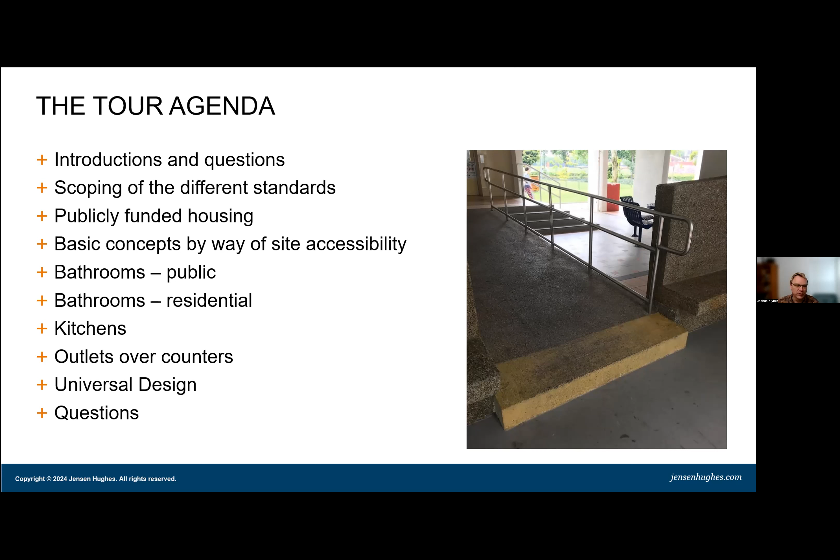What does this not include? I find this also very helpful. We're not going to be talking about existing buildings - that gets significantly more complicated and more nuanced, dependent on the specific building we're talking about and the condition they're in. We're not going to be talking about transient lodging, whether that is permanent supportive housing, homeless shelters, or hotels. We're not going to be discussing anything with a public right of way, because that is an entirely different set of standards than what is applicable within the project site.

I should probably change this a little bit. The 2022 OSSC - I'm going to mention a little tiny bit, just a couple of the accessibility changes. The 2017 A117 is kind of baked through this entire thing, but I'm not going to be addressing all the significant changes - I'll point them out where they come up. I've highlighted them in red font, but not addressing that change in standards specifically. Also, I'm going to be talking about a lot of these specialized conditions - I'll mention children's elements such as children's toilet heights, things like that, but I'm not going to go into detail. There are other specific requirements around restaurants, assembly spaces, healthcare. If you do have questions about those, I'd be happy to answer them towards the end of the presentation.

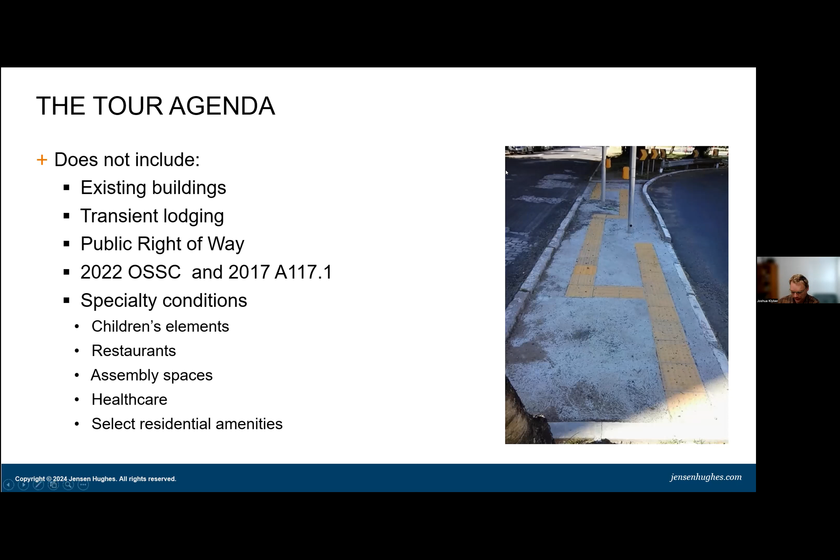All right, I'm going to get into scoping of accessibility standards.

The biggest thing about accessibility standards is understanding the difference between federal standards and state standards. I'll reiterate that all the way through this first half hour, 45 minutes, where we're talking about that. I'm going to go through most of the applicable standards and discuss when and where they should be applied, and if you have choices, what we recommend and what factors go into that choice.

Specifically around safe harbors, that always comes up as a question. I'm also going to talk about some spaces that might be a little confusing about which codes to apply. This happens a lot in multifamily. Are you applying public standards? Are you applying the safe harbors regulated by HUD? Are you applying both? I'll talk a bit about that and employee work areas, one of everyone's favorite exemptions for accessibility, and really clarifying what's required.

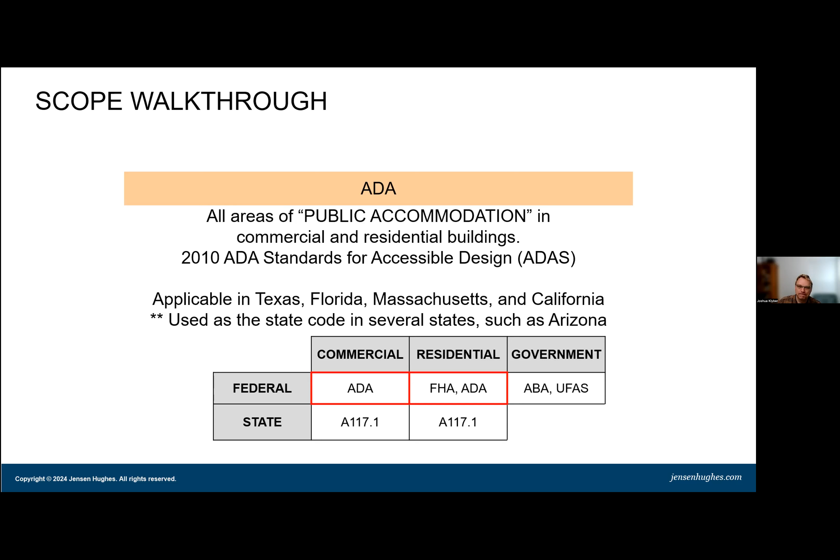What does apply to residential areas is the Fair Housing Act. Similar to the ADA, where the ADA is the federal act passed by Congress, the Fair Housing Act is a very simple little document—small but critically important, with wide-ranging implications—published by Congress.

What most people think of as, are you FHA compliant? Typically, a lot of people will think of the FHA Design Manual. That's kind of parallel to the ADA and the ADA standards. I'll talk a little bit more about the safe harbors in a slide or two.

Key things to know about the Fair Housing Act: it is applicable to any area that is accessed by residents and their guests. So not only does this include the residential units, but also the residential amenities, such as an exterior pool, a mail room, or a leasing office within a residential complex.

Other things to note: any building built before March 13th, 1991 does not have to comply with the Fair Housing Act. There is a little bit of nuance, especially if it was designed and permitted around that time, about when it was first occupied and what does it mean to be first occupied. That's some nuance I'm not going to get into today.

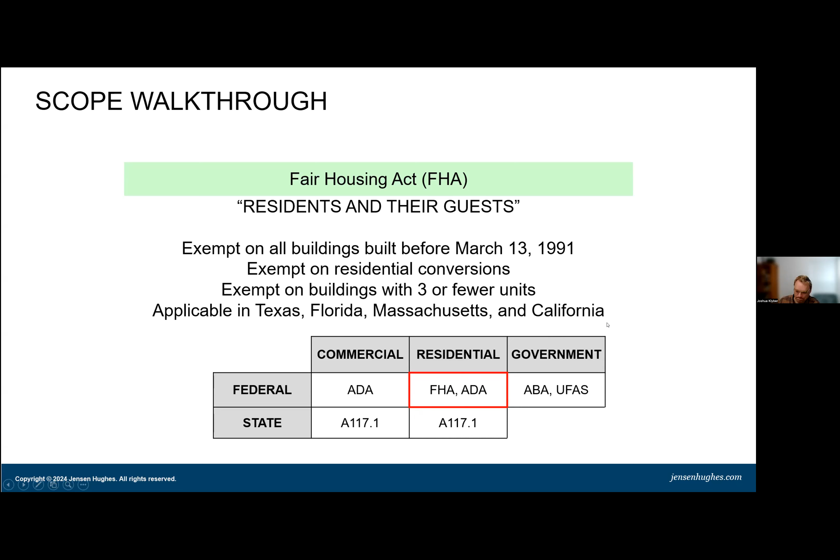So this is the federal residential code. In order to comply with the FHA, you have to comply with what they call a safe harbor. And a safe harbor is a standard - if you follow it, it demonstrates that you are fully in compliance with the Fair Housing Act. And there are about, I never remember the number, I think it's like 15 or 16.

Oh, I see a question. Somebody was saying it's hard to hear on the speaker, and I will speak a little bit louder. Thank you, Jim, I will do that.

So there's a list of about 15 or 16 different safe harbors or different standards. Most of them are out of date, say for example the 1986 version of the A117.1. For the most part, there's 3 or 4 that are commonly in use.

We highly recommend that everyone use the 2018 IBC as the safe harbor. If you're in a state that's using 2018 IBC as the state code, then by meeting state code, you automatically satisfy the Fair Housing Act. If you're in a state such as Oregon, which has been updated to be based on the 2021 IBC, it's not that big of a jump to go from the 2018 to the 2021 version. There's just a few little things that you need to know.

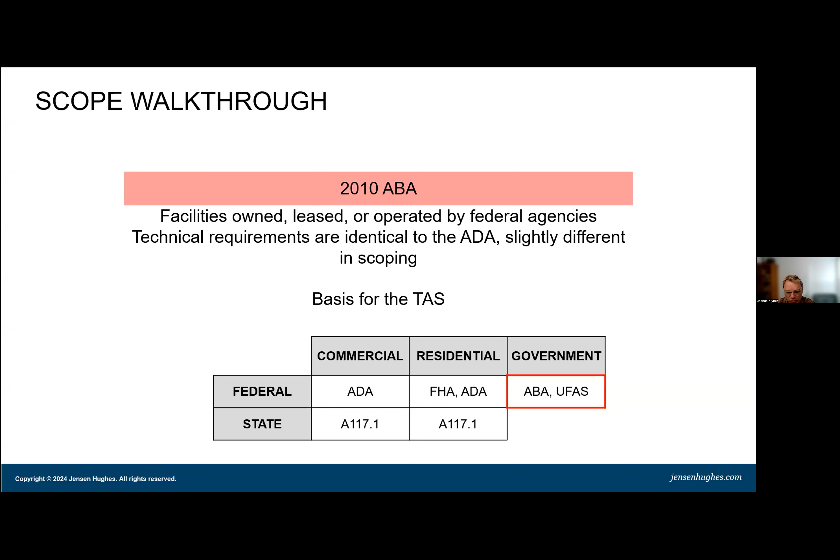The other federal standard we interact with a little bit more is known as the Uniform Federal Accessibility Standard, or UFAS, depending on how you pronounce it. This is also for federally funded, owned, and operated projects, but it applies to the residential portions, where the ABA applies to the public accommodation portion, like federal offices. UFAS is not only applicable to federally operated housing, such as BLM housing or housing at national parks, but it also applies to any kind of affordable housing funding program that is receiving money from HUD.

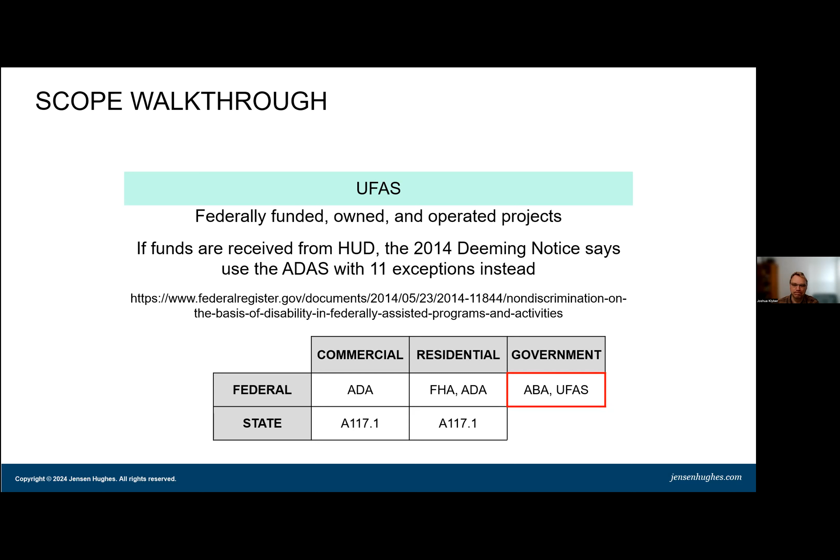All right, so I'm using this multifamily residential complex as an example of how to apply the different scoping. It can get a little complicated, especially given complicated complexes. So if you happen to have a variety of building types, say a 4-story building with an elevator and 16 units, how do you know which codes are applicable?

Just as a quick summary, the FHA is not applicable to any project that has 3 or less units, so 1, 2, or 3 units in it. So that's going to cover about 4 of the examples here where the FHA is not going to be applicable.

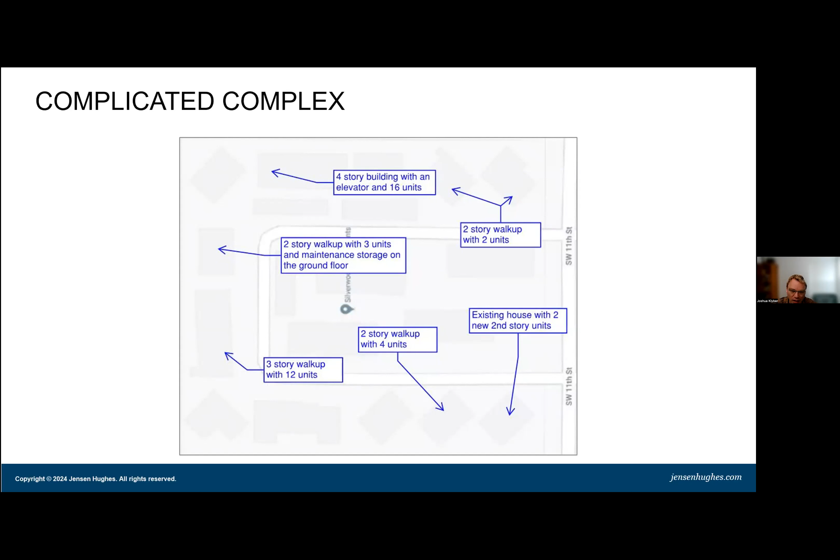So, a 4-story building with an elevator and 16 units. All units have to apply FHA-DM because it has more than 4 units, and the A117.1 because that's state code.

If you have a 2-story walk-up with 2 units, you don't have to have any accessible requirements at all because it's now under the residential code rather than the commercial code.

A 2-story walk-up with 3 units: because it's only 3 units, you don't have to apply the FHA-DM, but it's a walk-up, so you have 1 unit on the ground floor and a couple of units upstairs. You would only have to apply the state code to the bottom floor.

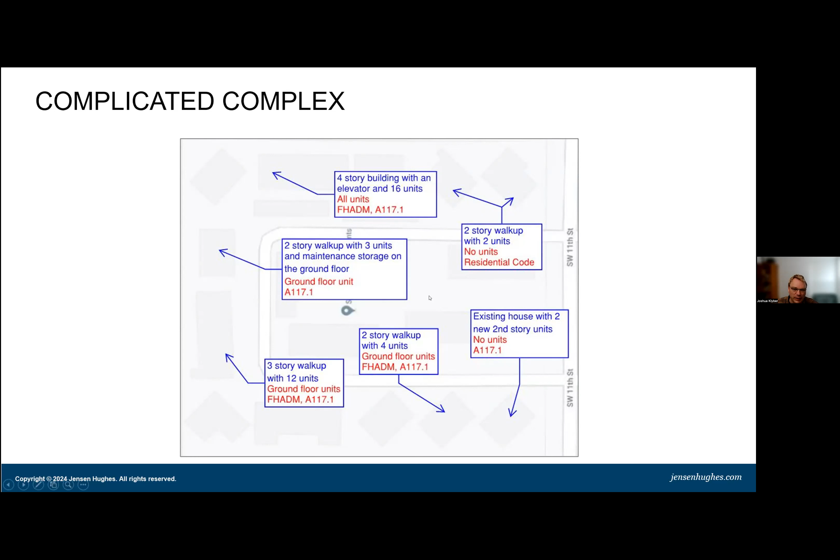So you have to take each of these buildings and analyze it per the scoping or applicability requirements of each of those different standards. It can get a little complicated, and you have to do it on a building by building basis. It's not the complex as a whole.

When you get into multifamily residential spaces, it can get complicated as to which codes apply to which spaces within the facility. So I'm going to talk about the left and the right, and then we'll go into the middle. On the left, we have public spaces - the public space areas of the multifamily residential complex where the public enters.

The leasing office, the mail room, the lobby, and if you happen to have any commercial tenants within it. Let's leave that there for now.

Going into the right hand side, if you go into the dwelling units, there are a whole bunch of different types of dwelling units. Here's a quick list of them. I'm going to go over them a little bit more when we get to the residential section of this presentation, but those are all the different ones that I'm aware of.

The ADA is not applicable inside of these dwelling units unless you're getting public funding - federal or state public funding. So the middle is where it gets a little bit more confusing.

What about these semi-public spaces or amenity spaces, like exercise rooms, pool rooms, pools, dog washes? Are those accessible by the public, or are they only for residents and their guests, or is it both public and residents? Generally, we recommend that you apply both and assume there will be public access to any of the amenity rooms. This allows a lot more flexibility for the use of that space.

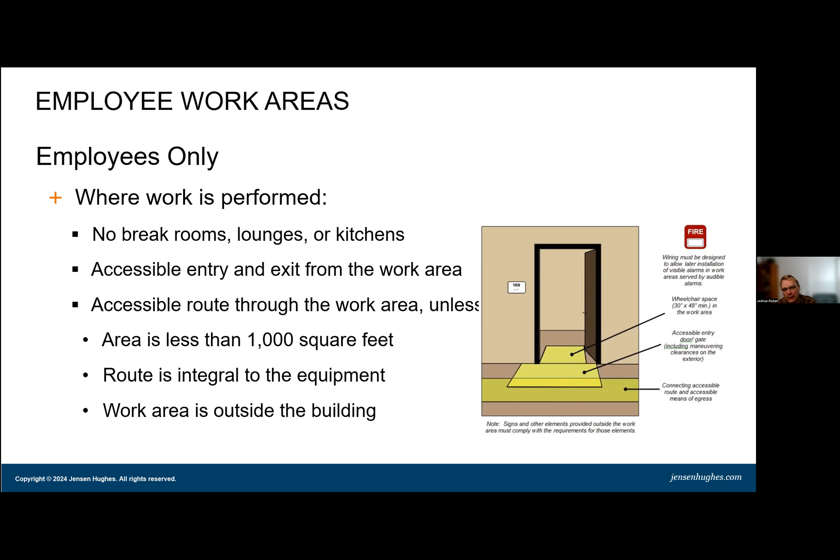One other quick thing to differentiate: employee work areas are not mechanical rooms. So your IDF, MDF, sprinkler rooms, boiler rooms, things like that, where it's a mechanical space accessed only for maintenance - that is not a work area, it has a separate exemption, and is not required to be accessible.

All right, that is the first section on generally how to apply the various accessibility standards to most projects. This next section is going to be specifically about publicly funded housing, because that gets a lot more complicated. Are there any questions at all at this point about scoping?

Wait for a second, let's see if anything pops up in the chat.

Okay, so let's go on to publicly funded housing. For those of you who were at the AIA Oregon Design Conference in Bend a couple of weeks ago, you may have already seen this section, but I'm going to rehash it here for those who haven't seen it yet. What is public housing?

I actually want to switch that to public funding. Public housing historically has been known as like 'the projects.' The picture on the right is an example from, I think, either Manhattan or Brooklyn, of some tenements - probably Brooklyn. They don't really look like this anymore.

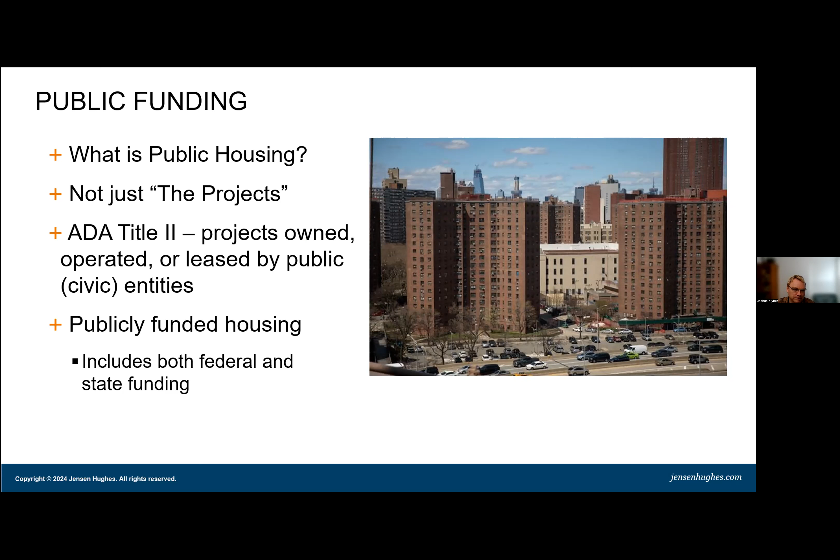So here are some examples of different types of publicly funded housing projects: low-income housing or affordable housing, transitional housing, sometimes known as permanent supportive housing. We also get transient shelters affected by ADA Title II, and facilities receiving public funding like alcohol and drug rehab.

Probably one of the lesser known ones is public universities. Any housing owned and operated by a public university is also considered publicly funded. This includes not only the dorms, but also fraternities and sororities. You have to be a little careful, though, because some of those fraternities and sororities are independently operated as a private club, and therefore ADA is not applicable to it.

Some of these buildings are actually owned by the university itself but operated independently. In that case, you do have to apply the requirements, not because it's a private club, but because of the funding and ownership of the building itself.

One key thing, and we'll get more into detail on this, is how do you know that funding is being provided for this particular project? The key phrase I always go back to is cash money. Is there cash money being provided to support the construction of this project? It's not necessarily tied to affordable, low income, or transitional housing intent. I'll get into some examples of what is not considered public funding.

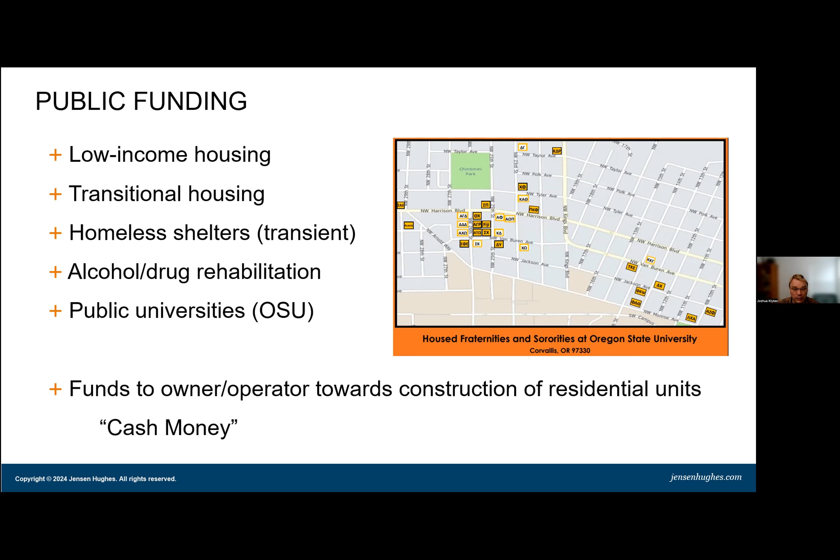Some of it also depends on where that money is coming from. If it is coming from HUD, that cash money is coming from HUD, not a loan, not tax credits, not mortgage insurance, but cash money, either in the form of a grant or a subsidy. It's coming from HUD, and then it triggers something called Section 504, Section 504 of the Rehabilitation Act of 1973.

Be careful, because each federal department has their own Section 504. There's HUD Section 504, Department of Energy 504, Health and Human Services 504, Department of Agriculture 504. HUD's is the most developed and most widely known. The technical reference is 29 U.S. Code Section 794, if you ever want to look it up. It's a dense read, only the really dedicated people might want to look at it.

Little side note, HUD Section 504 also applies not only to housing but also to education, healthcare, parks, and social services, because they fund a whole bunch of other corollary services besides housing.

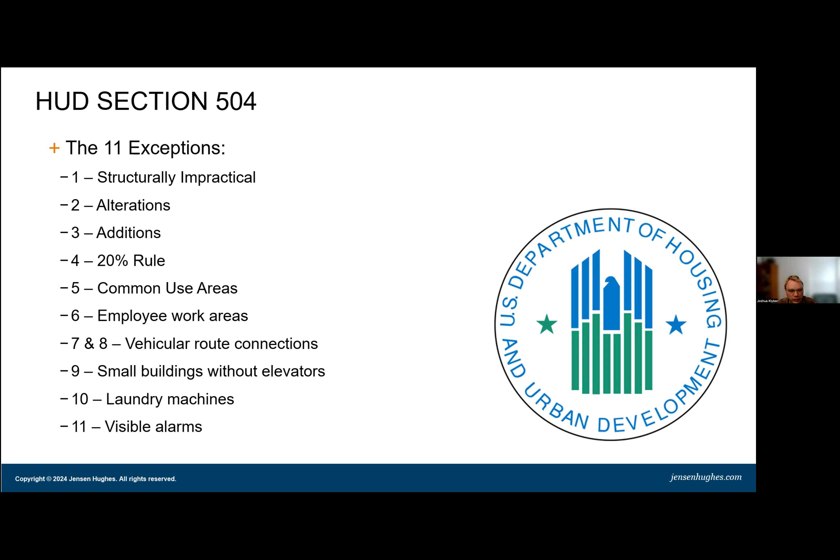Take a more specific look at these exceptions. There are only two that regularly come up on new construction of publicly funded housing, and I'm going to address those. The first one is employee work areas. That entire discussion about employee work areas, everyone's favorite exception—you can't use it in publicly funded housing. All employee work areas must be fully accessible.

This includes the back of house areas. The harder part on the upper floor is going to be janitorial closets, so that means you have to have an accessible mop sink. What does that look like? And you have to have accessible trash rooms.

So the dumpsters in your trash rooms in publicly funded housing have to be accessible. Good luck trying to find a dumpster that fits within the 48-inch high reach range. In California, where everything is a lot more strict, they will quite often put a ramp in behind the dumpsters, so that it has an elevated landing—that way the height of the dumpster drops to less than 48 inches above the walking surface.

Here in Oregon, it's not really done. Or Washington, it's not really done. I'll talk a little bit more about that on the next slide, about enforcement and what you really have to pay attention to.

And once again, I want to differentiate employee work areas from mechanical, electrical, telecom, and sprinkler rooms. Those are exempted under maintenance spaces or maintenance-only access.

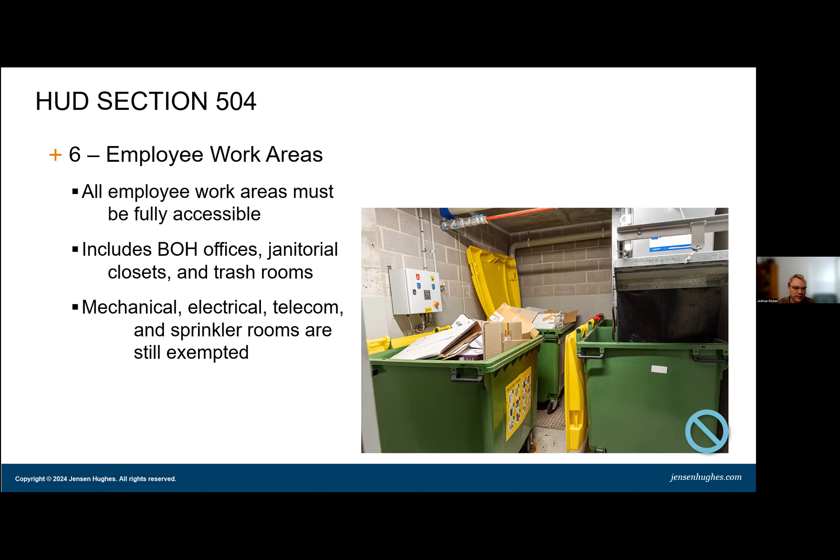The other one is going to be laundry machines. This is not necessarily going to be within the units, but in the common areas. According to ADAS, you need to have either 1 or 2 accessible laundry machines—not 5%—depending on how many are provided. But under the 11 exceptions, all machines have to be within the reach range.

So I want to address enforcement. One of the big questions is, okay, so you get public funding—say you happen to have stacked laundry machines, or dumpsters that are not fully accessible—who's enforcing that? Who's looking for that? Theoretically, it's going to be the people distributing the funds, whether that's HUD or your state agency.

Off the record, I've had conversations with a man named Rex Pace, who is currently head of architectural requirements for HUD and oversees enforcement. I asked him specifically about stacked laundry because to be compliant, you're removing approximately half the laundry machines in the facility. Who does that really benefit? You're not really benefiting anybody. And his response was...

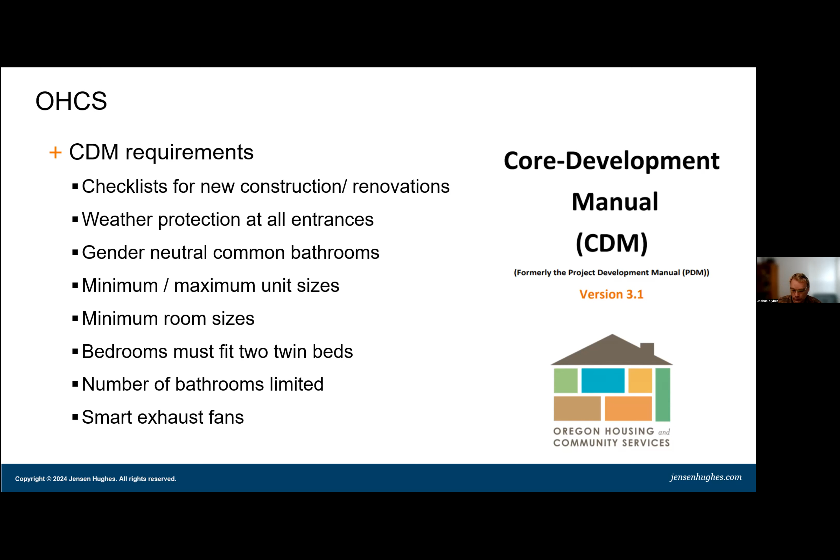The visitability requirements are triggered by getting public funding through OHCS. Keep in mind this is a different set of requirements than what's present in the A117.1. It's via this ORS - I should probably put that number up again. Most people have never seen these or looked at these.

It's very easy to meet - basically if you're meeting Type B requirements, you've got visitability covered. There are 2 situations where these visitability requirements might come up. If you have townhouses that are raised up, where the primary entrance is up a set of stairs, like on the right, and they're publicly funded, that would not be allowed. You have to have a stepless entry to every covered unit, so you're not allowed to do raised multi-story townhouses like these.

Also, if you have more than 20 units on a site, you have to have a public access common bathroom, typically at the leasing office or a clubhouse. So it's not very often you see a large publicly funded complex that doesn't have an office with a common bathroom - doesn't come up very often.

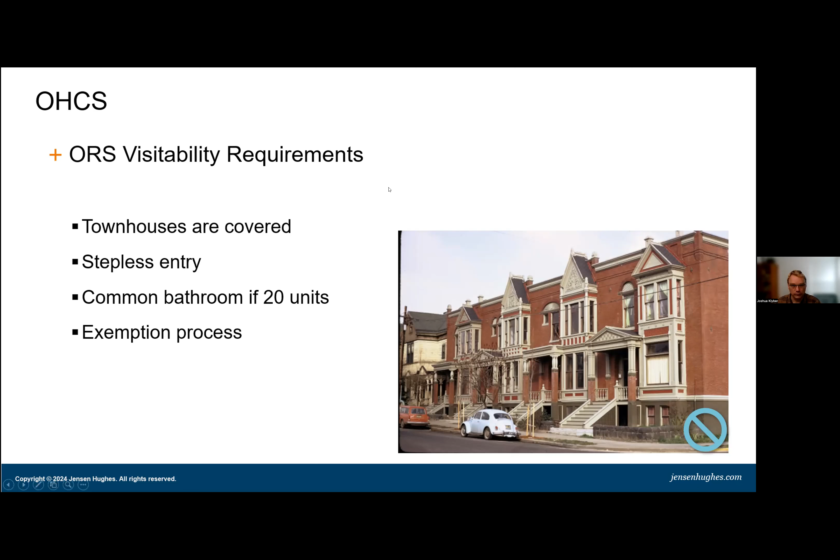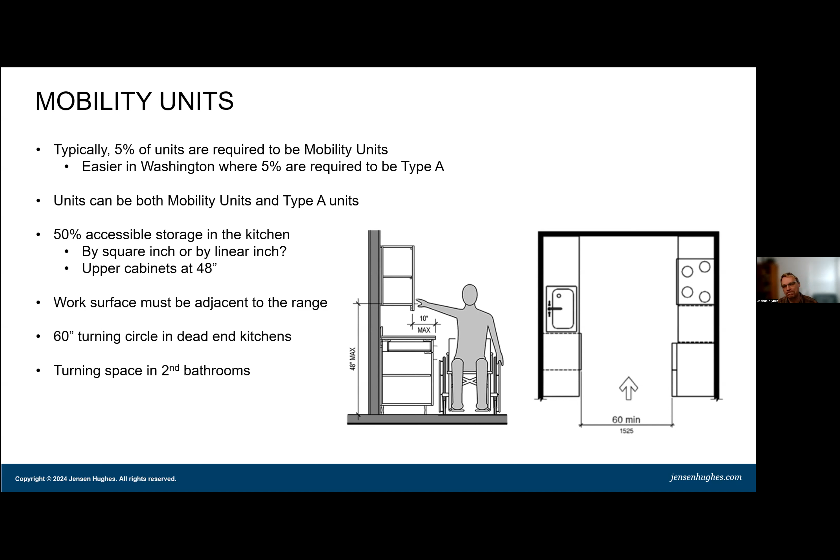So, how to calculate 50% accessible storage? The best, and as far as I know, only example in writing that's been published is by the San Francisco Mayor's Office on Disability. This is just the first page—it's actually a 2-page published PDF. The link is in the bottom left-hand corner.

And they use the area method. There's a couple of interesting interpretations that they've used that they employ on this. One is that the handles of the cabinet doors or drawers have to be located within the reach range in order for it to be considered accessible.

This affects the upper cabinets such that if the top of the bottom shelf of the upper cabinet is at 48 inches or 46 inches, depending on the depth of the cabinet, that handle also has to be all the way at the bottom. You can't locate it an inch up in order to have it look nice. But this is a San Francisco interpretation—that's what is required there in that particular city.

The other interesting one is in upper cabinets, you have to have a movable shelf, and that has to count toward that calculation. So you can't just provide a full height upper cabinet with no movable interior shelf. One other thing I should note: when you are calculating the 50% accessible storage, you cannot count the removable cabinets underneath the sink and the work surface, because it's assumed that they're going to be removed.

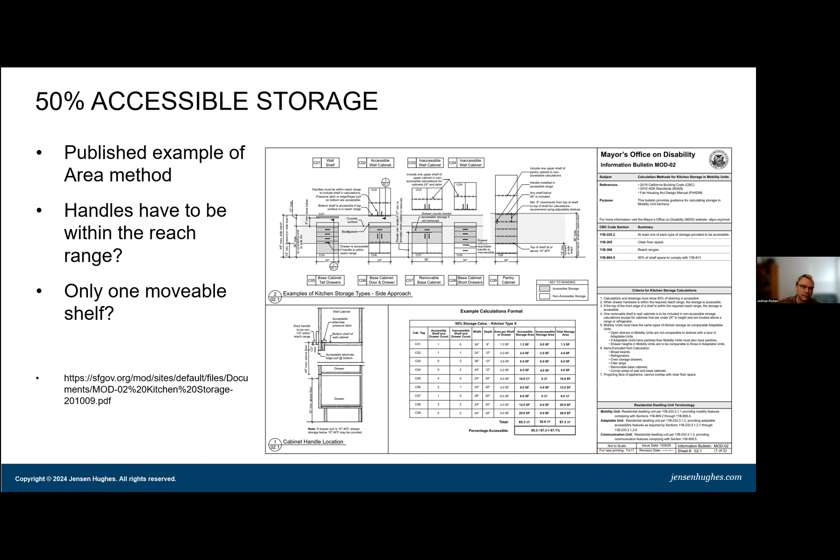The other thing that's required by public housing is communication units, and communications units may or may not be required depending upon the state. They are not required at the state level in Oregon, but I believe they are in Washington. It depends upon whether Appendix E of the IBC has been adopted by that particular state. Communication unit requirements under the ADA are pretty much identical to those at the state level. Typically, 2% of the units in public housing are required to be communication units. Be careful because it's a higher percentage in transient housing, so hotels and places like that.

They do not have to overlap with mobility units. Under transient housing, the requirement is that there has to be at least one communication unit that is also a mobility unit, but a maximum of 10%. We recommend going with that same guidance. There are people out there who are both blind and have mobility issues, or are both blind and deaf, especially in the elder communities. But we recommend separating them out as much as possible.

So what's required for a communication unit? Instead of just having a horn fire alarm, you have to have a strobe as well. You also, if you have a—what are they called—Door King, where you have the building entry device, that's at the main entry to the building.

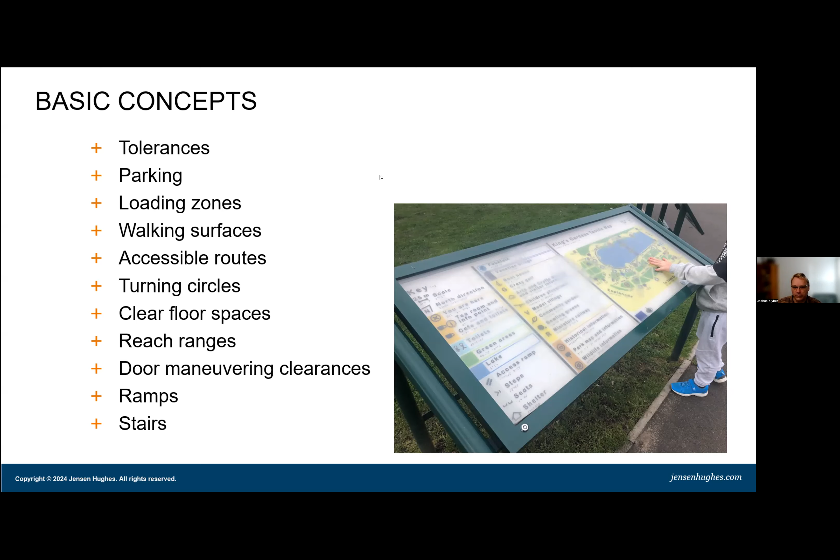Key things: 2017 A117.1 changes. Just want to run through these. This is a quick little summary of what has changed in Oregon and will be coming to Washington sometime very soon.

Chapters 10 and 11 have been reversed. In the 2009 version, 10 was residential and 11 was recreational elements. Those have been reversed, more to be in alignment with the ADAS, but what it means is that you have to change all the code references on all of your standard accessibility sheets.

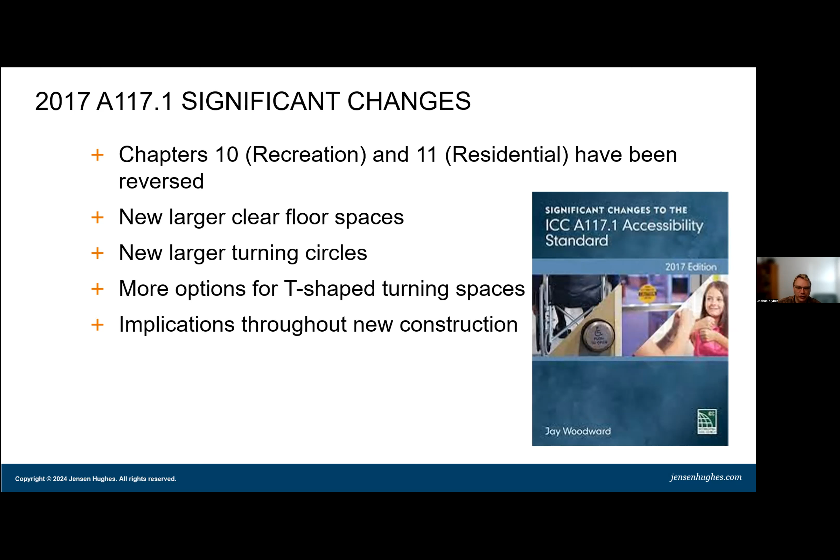Larger clear floor spaces, larger turning circles, more options for T-shaped turning spaces, and there are implications of all those things all the way throughout new construction, and those have been worked into all of the upcoming stuff.

Tolerances. Technically, there are tolerances allowed by the code if you have a minimum, a maximum, or a specific measurement. However, these are industry standard tolerances which are not defined, and they're arguable as to what they are. So what is the tolerance on providing a 30 by 48 clear floor space beyond the swing of a door? Nobody knows. Is there an industry standard that's been published for that? No.

So do not rely on these tolerances. One of the biggest things you can do to help accessibility go smoothly on a project is to build in tolerances into your drawings.

Places where that is critical is going to be in your hallway widths. I was just on a project a couple days ago where they had a hallway that was at 35.5 inches instead of 36, and that was because of baseboard. They did not really want to swap out their baseboard, and it was really hard to fix.

Clear floor space beyond the swing of a door in a bathroom - the problem is that you don't really know if you meet it until everything is installed, and at that point in time, it's really difficult to fix. And bathrooms are always really tight. There's examples of other places where you might want to include some tolerances into your drawings as well.

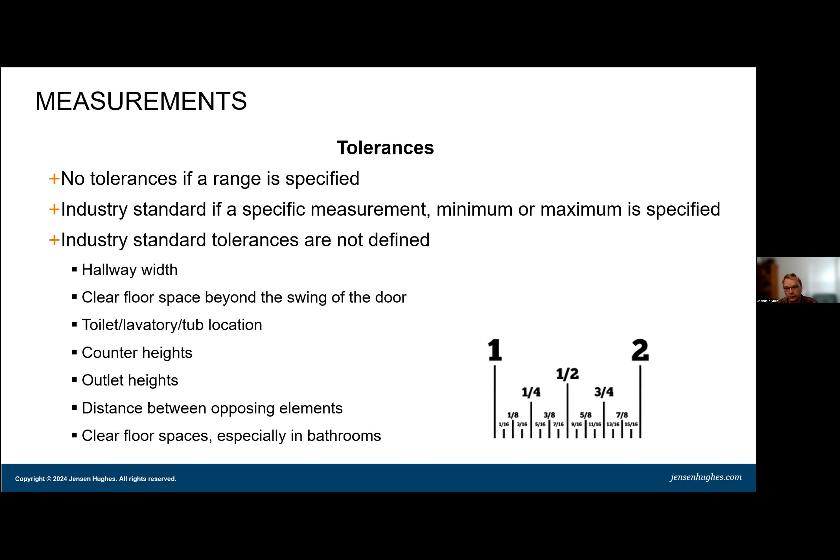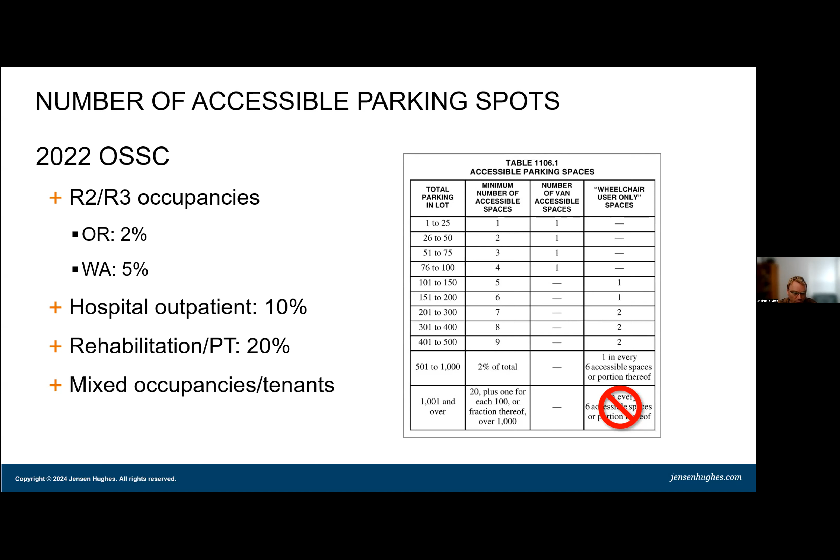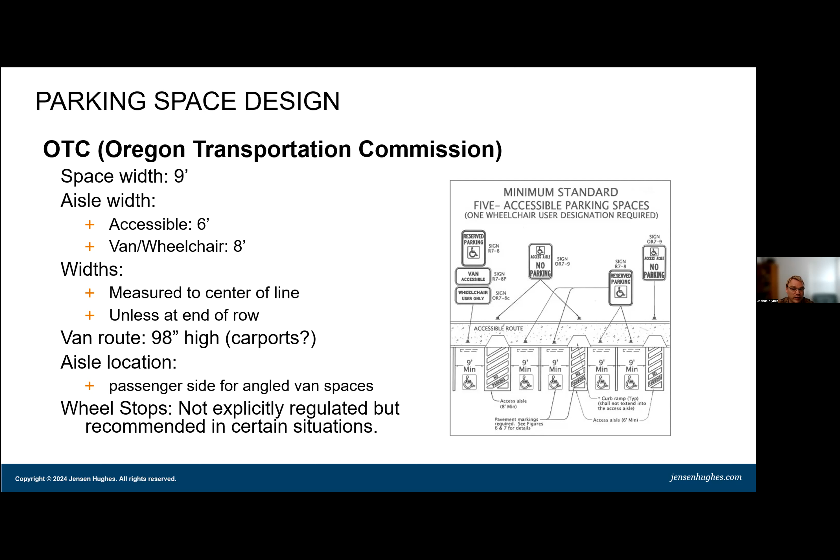Also, wheel stops - they're not explicitly regulated, but kind of recommended, such as in the picture on the right, where you have a parking space adjacent to an accessible route and the car overhang might decrease the width of that accessible route.

Kind of newer things as of August 2019 - I suppose that's 5 years old now. Some people still are not aware of this, but the aisles have to be marked for no parking. This is based upon what's been happening in California, where motorcycles have been parking in the accessible aisles. So they want to make it a lot more explicit.

For the most part, you do not need to install the post-mounted signs at the bottom indicating no parking in the aisle. Those are only required where there's snow or sand regularly present, so that you will not be able to read the marking that is on the pavement.

I'm not sure, but I believe that Bend might be requiring these post-mounted signs. Part of this is due to how much snow is there on a regular basis, plus how strict and conservative they are in terms of accessibility. If anybody is aware whether these are required in Bend or not, let me know.

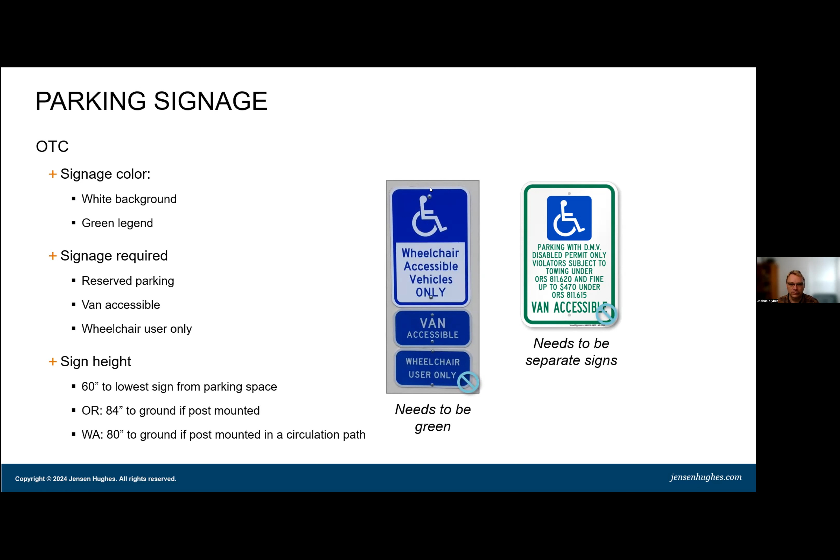I have another question. Melissa has asked if the height measurements on this last slide are measured - where are they measured to? It's measured to the bottom of the sign, the bottommost sign, depending on which sign you have.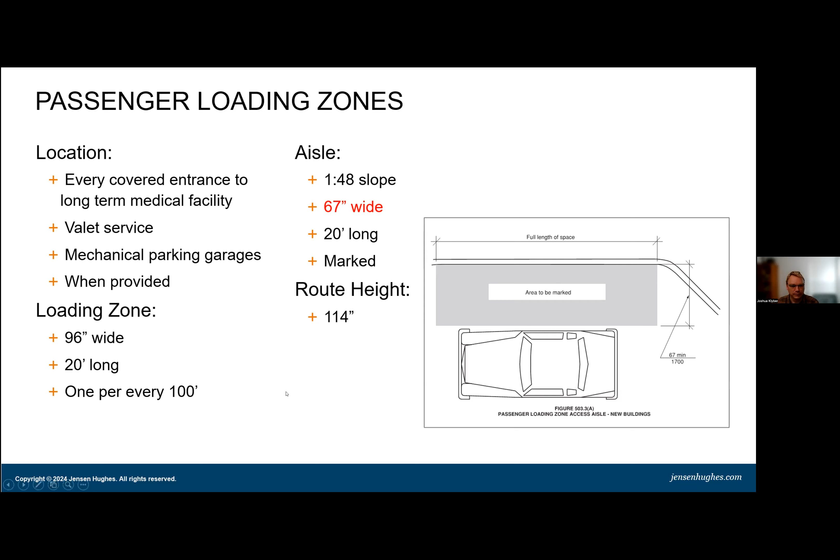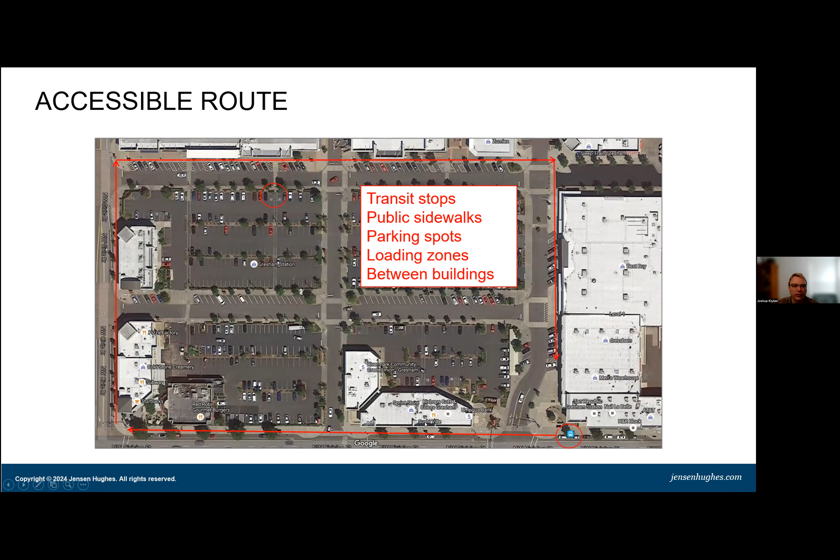It doesn't necessarily have to cross through the parking lot. Accessible routes need a minimum of 36 inches wide.

Let me throw in a caveat here. There was a new change in the 2017 A117 - exterior accessible routes now have to be 48 inches wide. I'll put this in the presentation before I send it out. So that affects exterior accessible routes, they have to be wider. Typically sidewalks are either 4 or 5 feet wide, occasionally up to 6.

One minor change due to the new 2017 A117.1: that distance between obstructions has now increased from 48 to 52 inches because of the expansion of the clear floor space. Also note that when measuring the clear width of hallways, because it says clear width, that does not include the baseboards. This is a matter of some debate, but it also depends upon the size and shape of the wheelchair and how the wheels are designed. In order to be safe, measure between the baseboards.

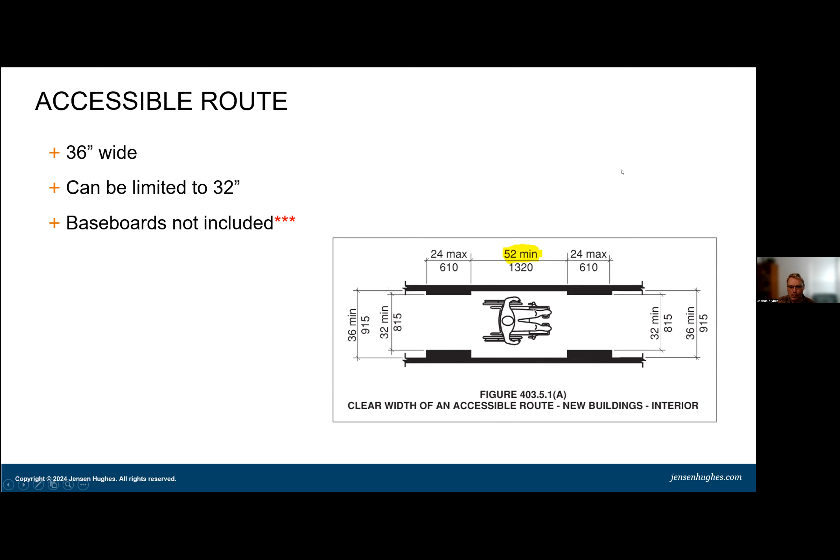In the 2017 code, there are also new requirements for doing 180 turns - there is a new third option for that. I want you to keep in mind that this 180 turn is not applicable at ramp landings. It is applicable... where do we usually see it?

Doorless bathrooms - at airports, train stations, we see it in bookstores and libraries where you're moving from one stack to the next. We also see it in queuing lines at airports, security gates, security points, movie theaters, things along those types of spaces.

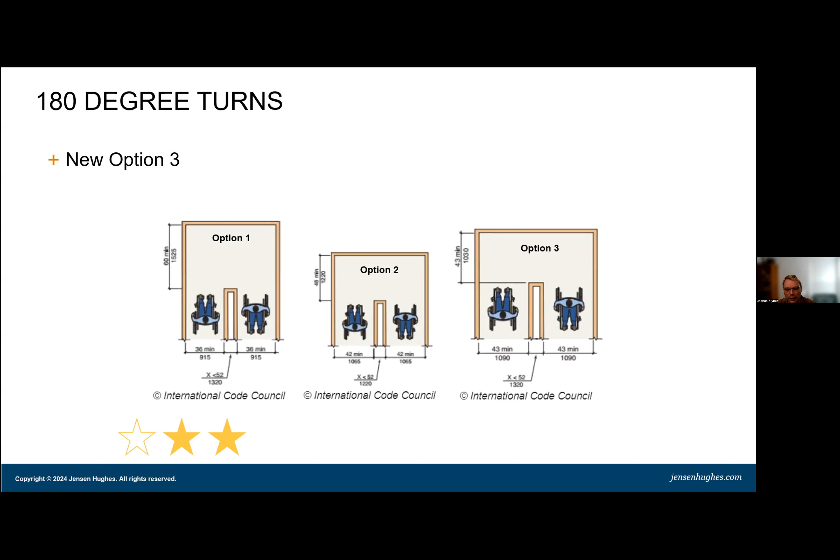What is new and is now in the 2017 code is 90-degree turns. Once again we see this in doorless bathrooms, residential facilities. Hopefully you're not designing 36-inch corridors, but basically you're not allowed to do a 36-inch to 36-inch corridor - you have to either do like 38 to 42, or 36 to 44. Those are options 3 and 4. I highly recommend that you don't do option 1 or 2 because it's just going to be more of a pain for the framers and the sheetrockers.

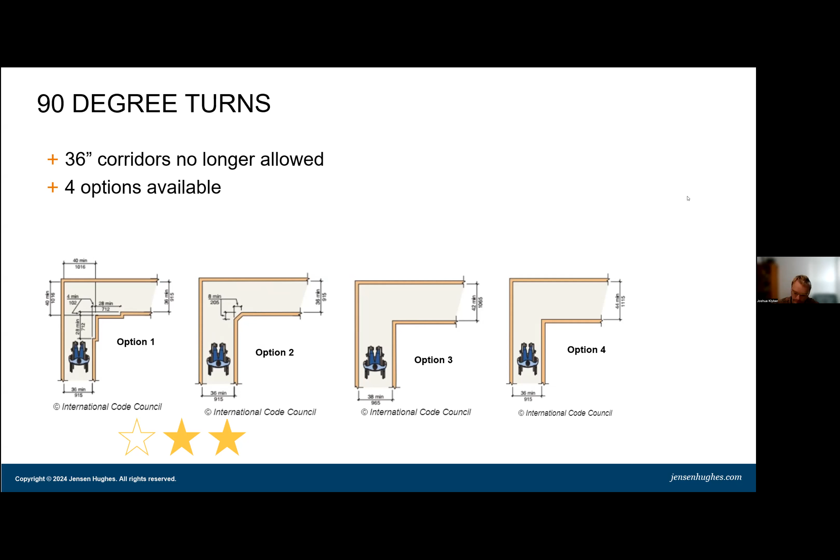Along various walking routes - and I want to differentiate that this is not along an accessible route but along a circulation path, which is anywhere someone might reasonably walk - you have to deal with obstructions along that path. Anything located between a height of 27 inches and 80 inches and sticking out more than 4 inches is considered an obstruction, and you definitely need to have a cane guard underneath.

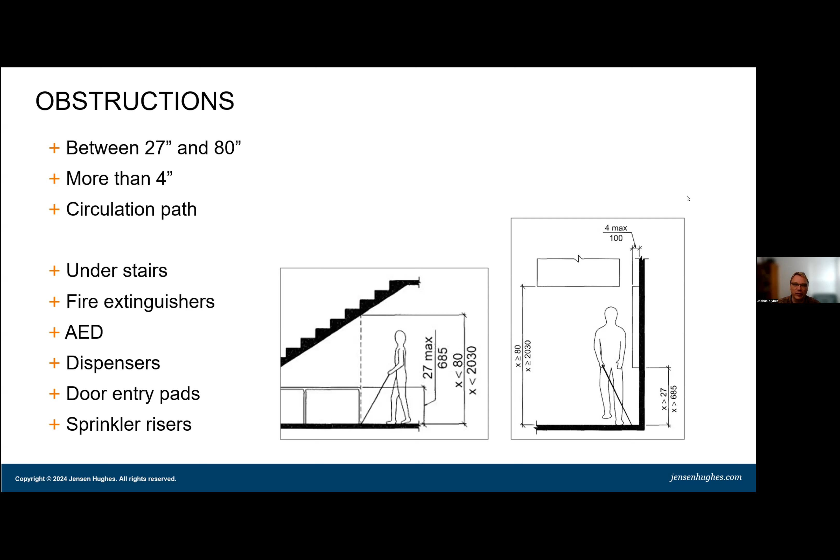So where does this come up? Under stairs, fire extinguishers, AEDs, dispensers, sprinkler riser valves and stairwells. Basically any of those last little things that get stuck on the walls at the very end of a project and are last minute.

Okay, getting into ramps - what is a ramp, what is a walking surface? Pretty much any cross slope, so anything perpendicular to the direction of travel, you're limited to a 1 to 48 slope, or about a 2% grade. It's actually 2.083, but most people ignore the .083 and just say 2%. This same slope is also applicable at all clear floor spaces and door maneuvering clearances as well.

Routes - so along a particular walking route, you are limited to a 5% grade or 1 to 20 slope. If you go above that, it's considered a ramp. A ramp is anything between 5% and 8.3%, with a maximum pitch of 1 to 12.

There is a provision within the code for a pedestrian ramp that is allowed to go steeper. I highly recommend that you don't rely on that - that's what's allowed for a ramp along a non-accessible route. I would encourage you, don't even look at it, don't think about it. Also, I've not included any slopes for ramps in existing buildings, of which there are some slightly steeper slopes allowed for very short distances.

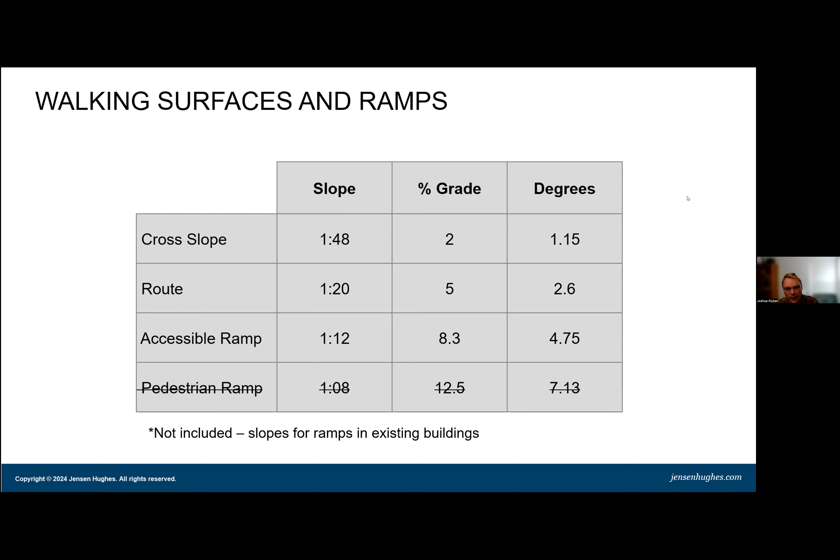Also within the accessible route, the maximum change in level is going to be a 1/2 inch, and that's typically with a bevel.

Where it sometimes gets a little bit trickier is you get the surface mounted lights that are in the sidewalk. It becomes a maintenance issue.

The other place it gets a little bit confusing is at sliding doors. You are allowed to have 3/4 of an inch change in level at the threshold for a sliding door, but only within residential units. If you have a sliding door in a public area, you're still limited to that 1/2 inch, which basically means you're going to be insetting that sliding door jamb into the floor.

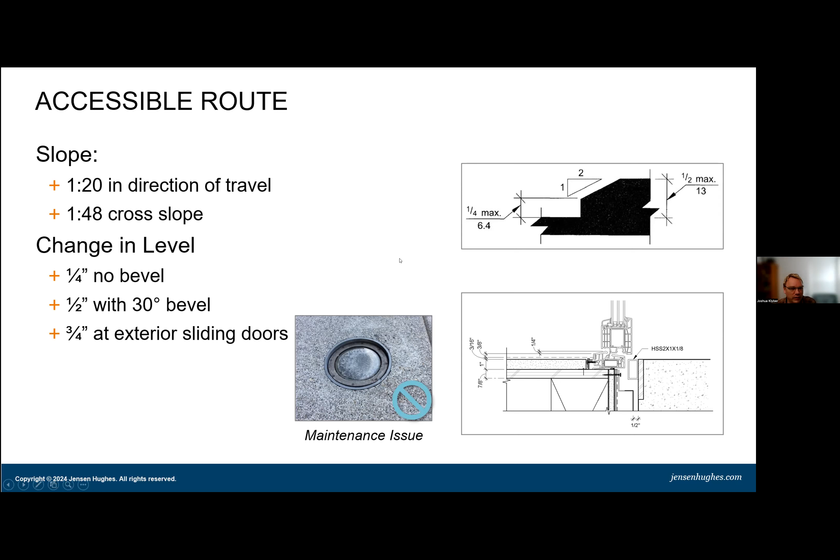All right, getting into the turning circles. One of the biggest misconceptions about turning spaces and T-shaped turning circles is that they're required in every room. And that is not true.

This is the full list of where turning spaces are required: in every room in an accessible unit, that's for transient like hotels, motels, Airbnbs, kind of thing. Also in every room in a type A unit, in all bathrooms, not necessarily in the bathroom stalls, just one in the bathroom, in saunas, changing rooms, and in between doors in a series.

In Oregon, there's also a turning space required at an exterior clustered mailbox that's of a weird dimension. That is a 6 foot or 72-inch turning space. That's a weird outlier in Oregon. But for the most part, this is the full list of where turning spaces are required.

They're not required in every room. They're not required in mail rooms. They're not required in trash chute rooms. However, I recommend that you put them in every room. Most people have used a turning circle as the standard.

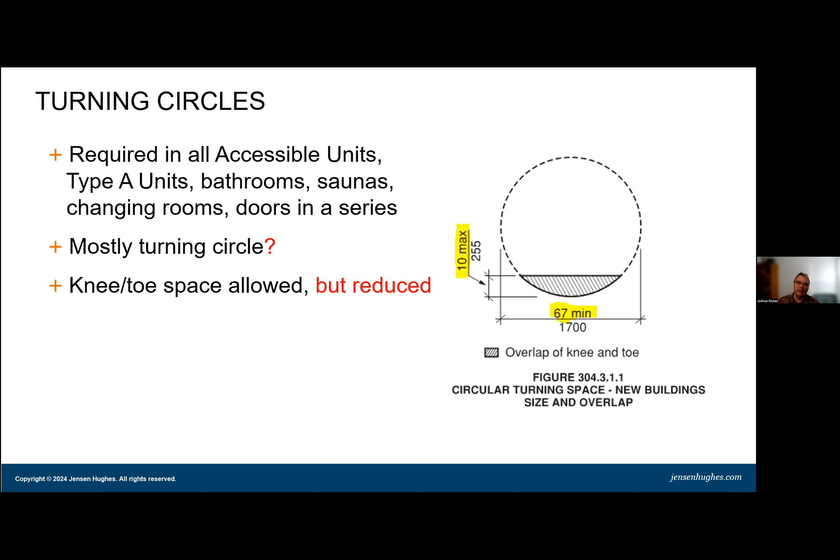The maximum amount of overlap that you can have a turning circle go underneath an obstruction under the new code is going to be 10 inches, or slightly more than that toe space. Also keep in mind that you can only have that obstruction under the turning space on one side. You can't have it all the way around the circle or on multiple sides.

In T-shaped turning spaces, there are now 3 options instead of 1. Option 1 in the top right-hand corner was the original T-shaped space, but now there's 3 in order to provide more flexibility. May be useful in smaller spaces.

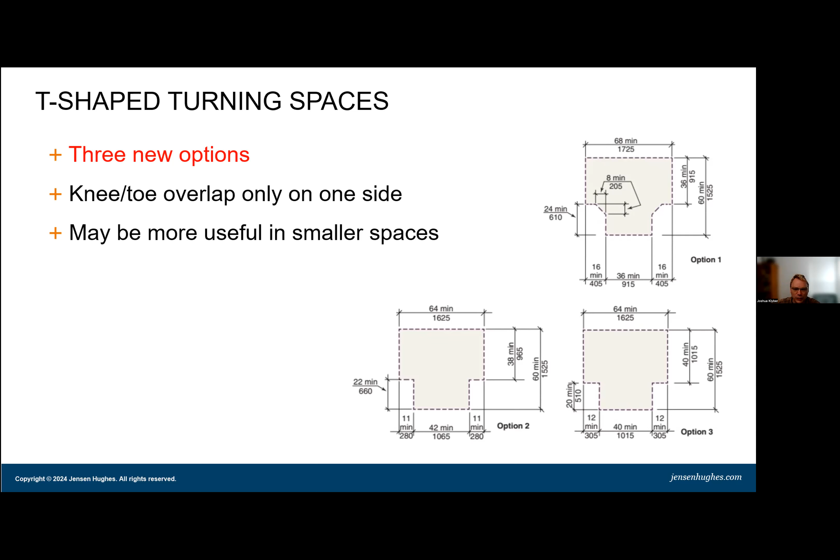So I wanted to compare the T-shaped turning space, option 2, to the turning circle. Note that the T-shaped turning space is 60 inches deep, where the turning circle is 67 inches deep. Therefore, you can use the new T-shaped turning space in smaller spaces.

So when you're talking really tight bathrooms or kitchens or walk-in closets, it might be more beneficial to use the T-shaped space.

One of the catches on this is at the bottom, the bottom of the T has to be 42 inches across. Where this comes into play is, say, in a bathroom and you want to have one length or the base of the T located under a sink. Sinks, or sink cabinets, are typically 30 or 36 inches wide. So in order to locate this T-shaped turning space under a sink, you have to make sure you have a 42-inch wide clear floor space underneath that sink.

So there's some caveats. You can get a smaller space in the bathroom, but you have to have a wider open space underneath the sink. But consider that.

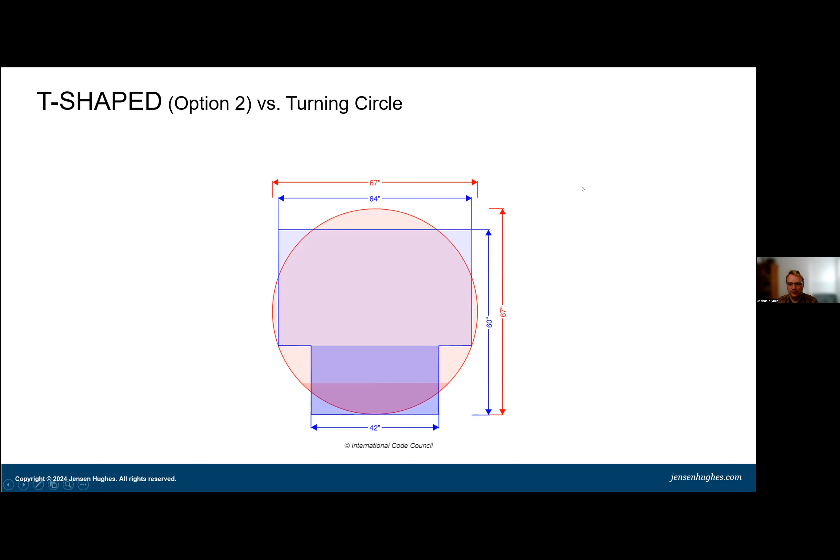Knee and toe spaces. Hopefully everyone is familiar with this particular diagram. Not going to go into it too much. The one thing that I really want to mention here is...

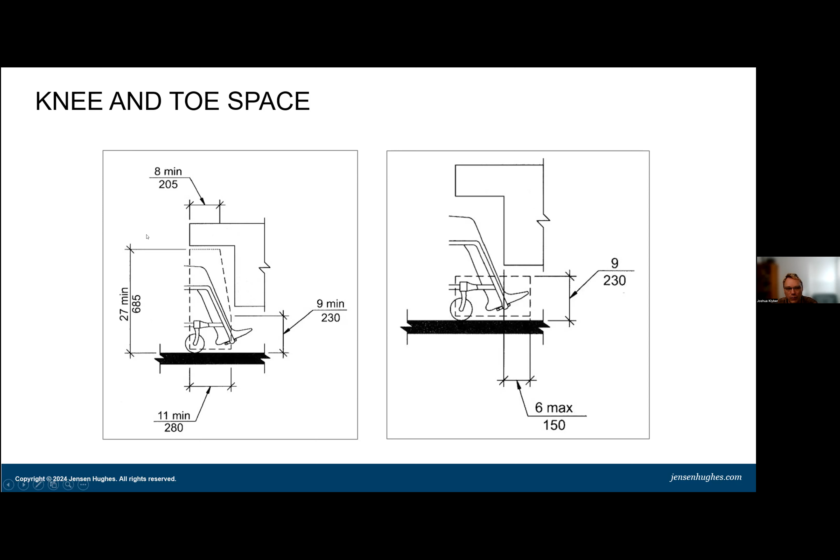...that the front line of the toe space has to be aligned with the controls. A lot of times people will put in the minimum knee and toe space underneath the sink, such that the toe space is not aligned with the faucet controls, but it has to be. So that 8 inches minimum for the knee space quite often is more than 8 inches. Okay, hopefully that makes sense.

Clear floor spaces have also increased in size.

They used to be 30 by 48 inches. They have increased to 30 by 52 for new construction. When you get into multifamily residential, it gets a little tricky. So that 30 by 52 is required for public spaces, new construction, and also type A units, but not for type B units. Type B units still use the 30 by 48. I'll reference that more once we get into the units.

Other things to think about: parallel versus forward approaches. We're going to talk about each of those at different appliances and where each is required. Especially when you're doing a clear floor space beyond the swing of a door, please do not stick in a diagonal clear floor space beyond the swing of the bathroom door.

Makes it really hard, I know it's hard in tight bathrooms, but try not to do that. Other things - can anything stick into a clear floor space, such as handles, baseboards, towel bars, countertops? The only one that's legally allowed is handles, so cabinet handles from ranges, dishwashers, cabinets can stick in there. Baseboards, towel bars, countertops all have to be clear - well, countertops there's a little bit of allowance in type B units, so it's allowed to stick up to 1.5 inches within that. But for the most part, no other obstructions are allowed within that clear floor space.

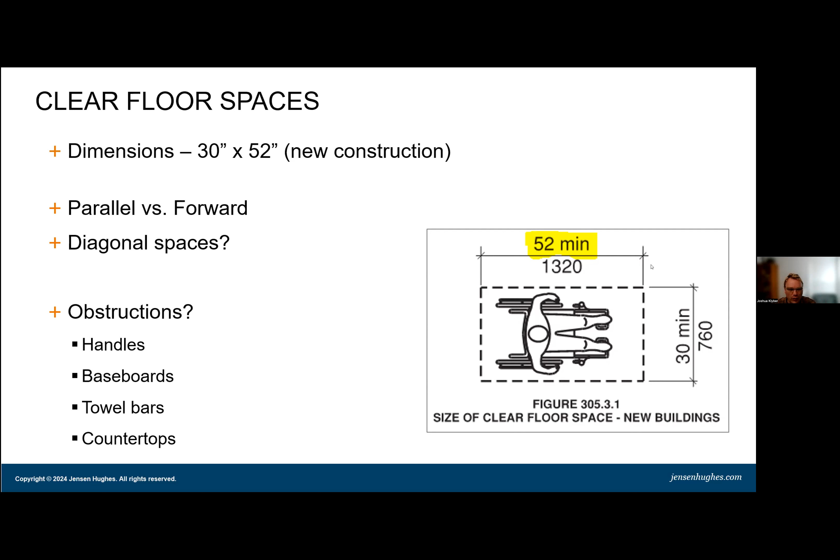Also be careful about alcove conditions - they have increased requirements. For example, on the right in the bathroom, typical bathroom plan, this sink is an alcove because the depth of that space is deeper than 24 inches, so the sink width has to be 36, because an alcove is shown on the upper right and left. One thing to keep in mind is that with the longer clear floor space, the depth of the alcove remains at 24 inches - it has not been increased to 26 inches.

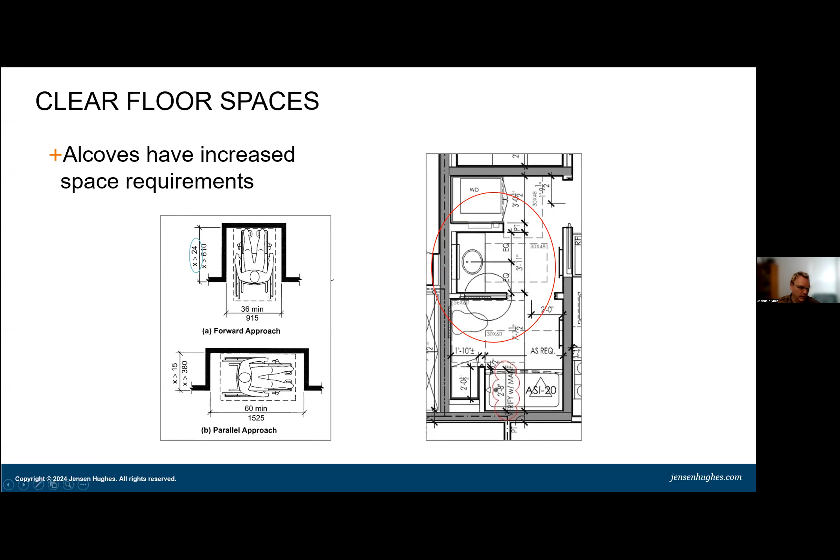All right, reach ranges. Parallel approach, side reach - a lot of times it can be centered or offset, depends on the code and the appliance. The big thing to remember is you have a 24-inch max reach range if you're reaching over an obstruction - this is what happens in type A units at counters. Generally, the reach range is 15 to 48. If it is over that obstruction, it drops to 46.

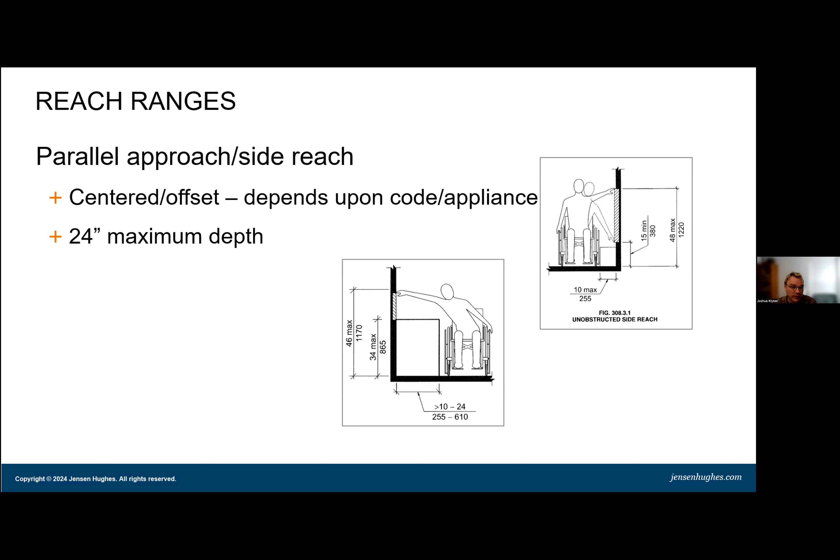If you do a forward approach, you're not allowed to reach over solid obstructions at all. This is where that alignment of the knee and toe space with the controls at a kitchen sink comes in - you're not allowed to reach past your toes. You do have to provide that knee and toe space if you are reaching over an obstruction. The bottom right kind of shows that. Please ignore this diagram - the fact that this person has extraordinarily long arms and are reaching past their toes. That diagram is incorrect.

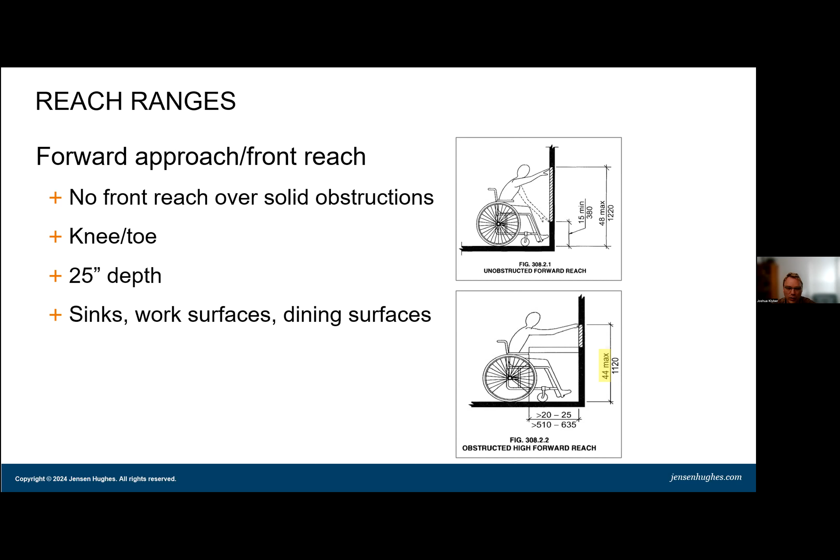You're not allowed to reach past your toes. Maximum depth of the obstruction increases to 25 inches, but also the reach range when you're doing a forward approach drops down to 44 inches instead of 46 inches. So be aware of that - it comes up occasionally when you have outlets over work surfaces.

Door maneuvering clearances - these are some of the door maneuvering clearances. There are tons of them. Things to take into account: forward approach, parallel approach, are you on the push side of the door or the pull side of the door, are you approaching from the latch side or the hinge side?

There are two minor changes in the 2017 version. This forward approach has increased from 48 inches up to 52 inches, but because it's a forward approach to the door, you're generally going to have that extra 4 inches anyway. The other one is this particular diagram - when you're approaching on the hinge side, push side of the door, they are no longer requiring the 12 inches beyond the door, so it makes it a little easier. This usually comes up when you have a double loaded corridor and you have a door on each side at the very end of the corridor. Comes up in residential or offices.

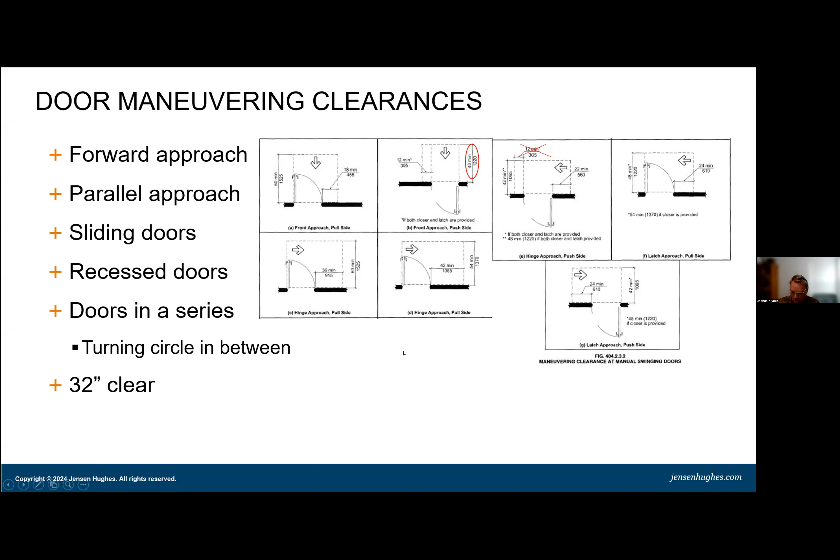I'm going to address mainly these two door maneuvering clearances, hopefully everybody knows these two, they're the most common ones. Forward approach needs to be 60 inches deep, 18 inches on the side for all doors. If you're on the push side, remember it's 52 inches now.

Except inside, even at your type B units because it's at the entry, it has to be 52 inches forward approach, 12 inches on the side if it has a latch and a closer. If you don't have a latch and a closer, you don't need that 12-inch side clearance.

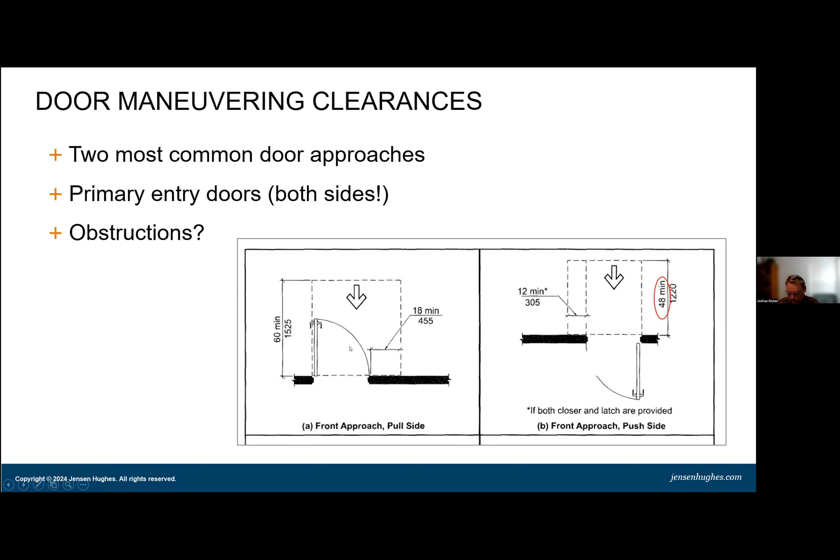Be careful of obstructions within this 18-inch space, such as an adjacent stair handrail, like this picture right here. If you're inside a stairwell using it as a pass-through for the exterior, you're only allowed a maximum 8-inch depth to that recess before you have to have the side clearance. So that condition in the picture is non-compliant. Watch out for the 8-inch depth.

Also, if you are doing shear walls, suppose it's a demising wall between adjacent townhouse units or walk-up units, generally a 2x6 wall will still give you less than that 8-inch depth adjacent to the door. But once you get up to a 2x8 wall, that's when you start getting more than that 8-inch depth.

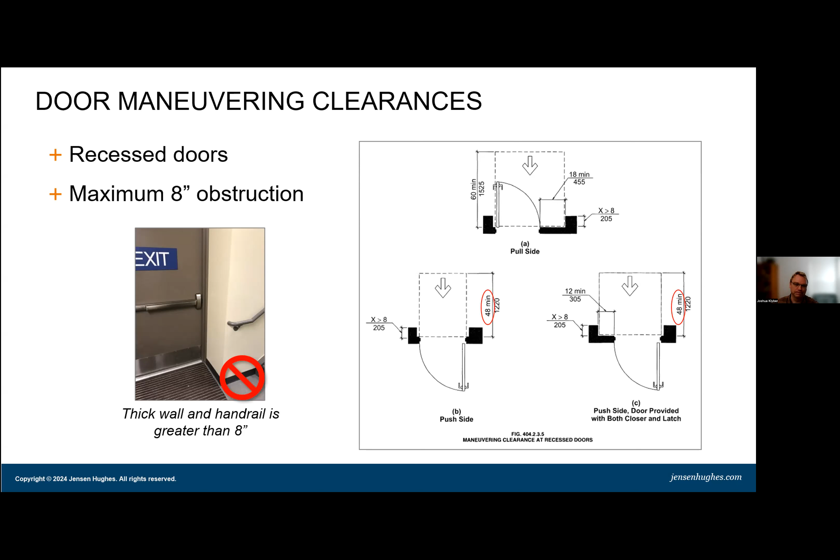All right, curb ramps. I'm not going to talk too much about curb ramps because this is typically within the realm of the civil engineer, but just to give you a heads up as to what you need to be aware of so your civil is taking this into account.

Tactile warning strips previously were not required anywhere within a project site, even at curb ramps, unless you had a street, not necessarily within a parking lot, but within a street within your project site.

We generally recommend that you provide as few tactile warnings as possible. They are really helpful for people who are blind, to alert them that they're about to enter a place where there is traffic moving at speed. And the at-speed part is critical.

Civil engineers tend to put them at every single curb ramp of every single type. When you have it at a curb ramp that leads from a sidewalk to an accessible aisle, they're not even entering traffic at that point. So why is that tactile warning there?

Tactile warnings are more difficult for people with crutches, people in wheelchairs, the elderly. These are the populations that are going to be using the accessible parking spaces, and for them to traverse that tactile warning strip, it actually is a slip, trip, and fall hazard.

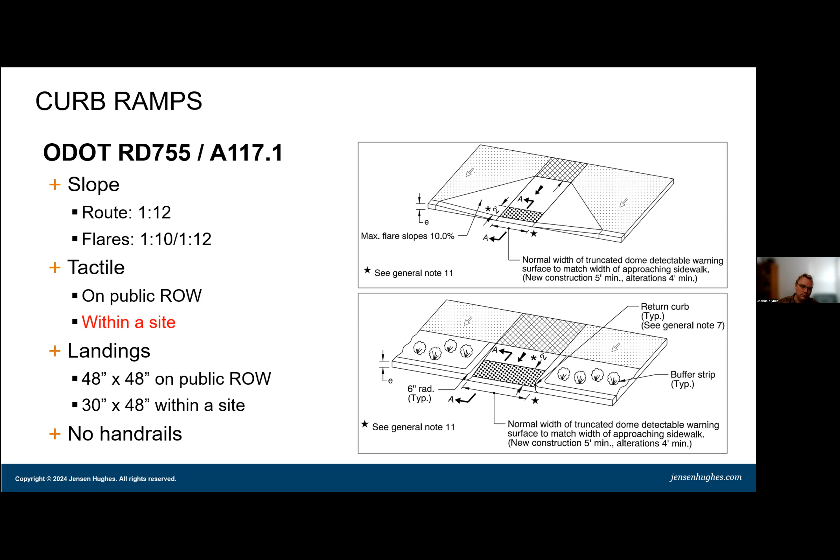There's a whole bunch of new types of curb ramps in the A117.1, but all of these have been in the civil engineering portfolio for a long time as part of engineering drawings or a document called PROWAG, Public Right-of-Way Accessibility Guidelines. They're just kind of bringing those into the site as well.

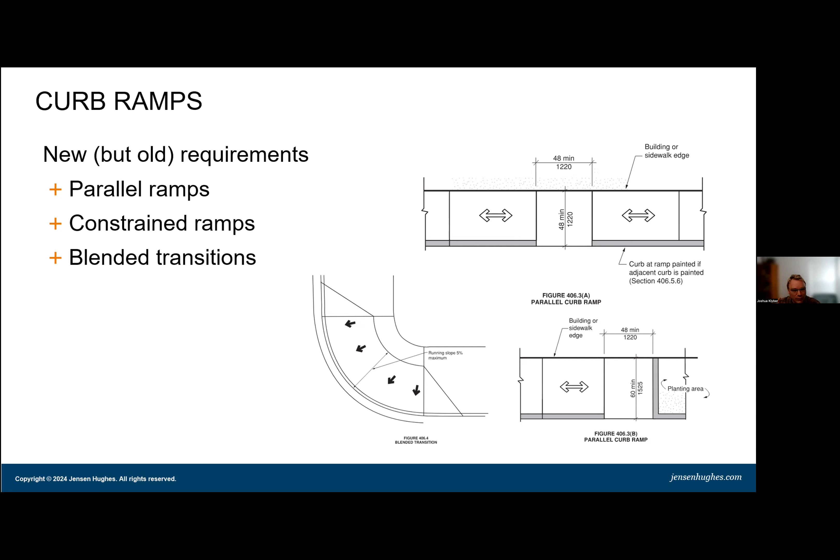Once again, should all be in the realm of your civil engineers, but it would be good for you to know about it, to double check your civils.

Ramps. So 1 to 20 to 1 to 12 in the direction of travel, 1 to 48 cross slope. We kind of covered that when we were talking about walking surfaces and general slopes. Some new information.

Hopefully you know that the maximum rise on a ramp is 30 inches in change in elevation. Otherwise, you need an intermediate landing. You also need landings on the top and bottom. Any change in direction requires the landing.

If that ramp rises more than 6 inches, then you're required to have handrails. If it's less than 6 inches, it's your choice about whether you have handrails or not.

If you do not have handrails, there's a little known provision. It's hidden in a weird place in the IBC/OSSC, under general means of egress in section 1003, I believe. It says if you do not have handrails on a ramp that is 6 inches or less, you need to have a contrasting surface in order to warn people who are low vision.

That's rarely enforced. I've only ever seen it enforced by, I don't know if it was Hillsboro or Washington County, one of the two.

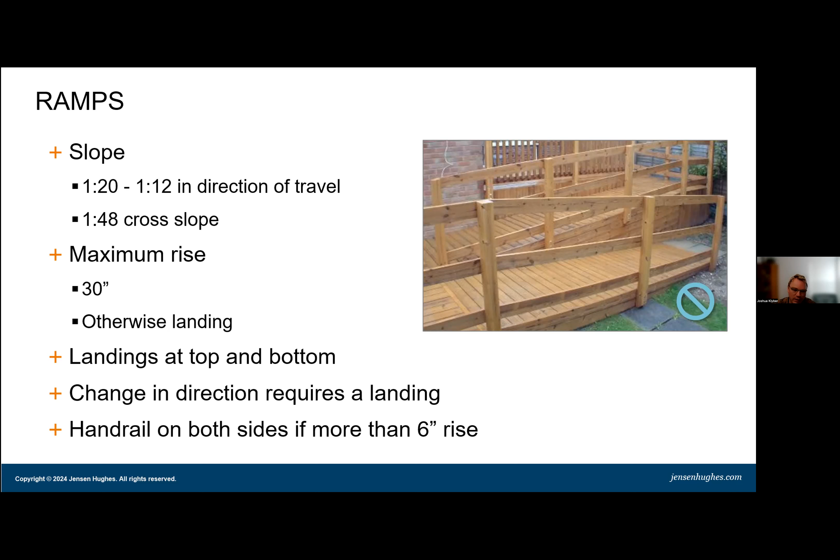I've already included that, I guess put it in there twice.

Landing size: you need a clear length of 60 inches at a landing. Note that this has not increased to 67 inches with the new turning space, because the turning space is no longer required at a landing. It used to be tied to the sides of the landing space; now they're just saying it has to be 60 by 60. Once again, these 180-degree and 90-degree ramp landings are not regulated by those 180 and 90-degree turn dimensions we talked about earlier.

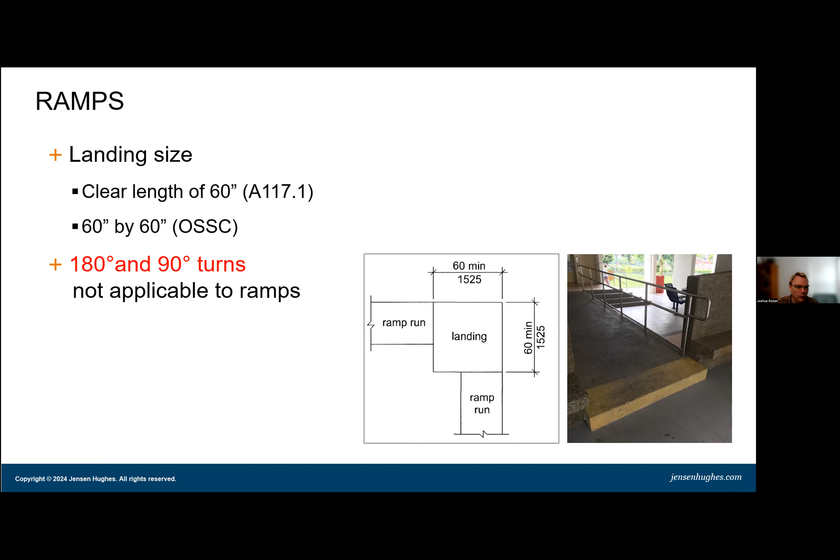One debate in accessibility is whether handrails or guards are allowed within the 60-inch by 60-inch minimum clear landing space. The technical official answer is no, but it's common practice that the pad is 60 by 60 inches with the handrails and guards kind of within that. Down in California I pay a lot more attention to that; it's a little bit looser up here in Oregon. Edge protection: on ramps you need either a 4-inch curb or a barrier at 4 inches or less in the handrail.

That way a person with a crutch, walking up and down the ramp, doesn't slip off the edge underneath the handrail. One alternate option is a 12-inch extension outside the handrail instead of that 4-inch curb. This applies at landings too. So this picture on the right that I put in here...

Anyone notice there's Braille up to floor 9, but floors 10 through 14 and that mysterious 0 floor - or is that the roof? Not sure what that is. It doesn't have Braille. I thought that was a curious image, just another one of those. Oh, and most likely nobody's going to be able to reach this number pad either; those are typically over the height.

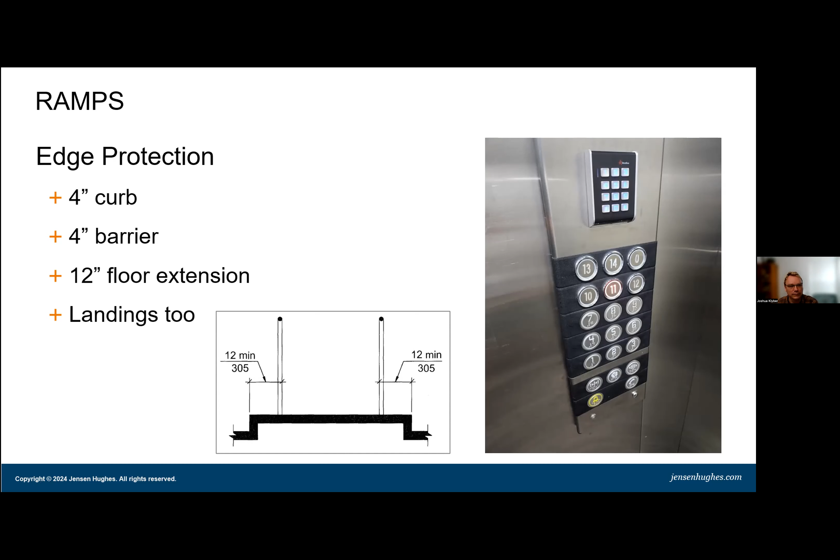Okay, stairs as part of a public means of egress. The reason I'm putting that in there is stairs in the OSSC and the A117, even though they're written in the A117, are not applicable to any project. So those stair requirements, ignore them. This gets into an interesting debate about scoping - there is no actual scoping section that points to the stair requirements in the A117.1, and that's why they're not applicable.

The only stairs that are regulated are actually under the ADA. Under the ADA, any stairs that are part of the public means of egress have to meet the accessibility requirements. So they are scoped under the ADA, not under the A117.1. Probably the big implication is you do not have to provide contrasting nosing at any stairs, because that requirement is only in the A117.1, which is not scoped - it's not in the ADA.

However, I would recommend putting contrasting nosing at least at the top and bottom riser. You don't necessarily have to put it at every riser - as people walk up and down stairs they quickly get the rhythm, so they don't need to see every single riser.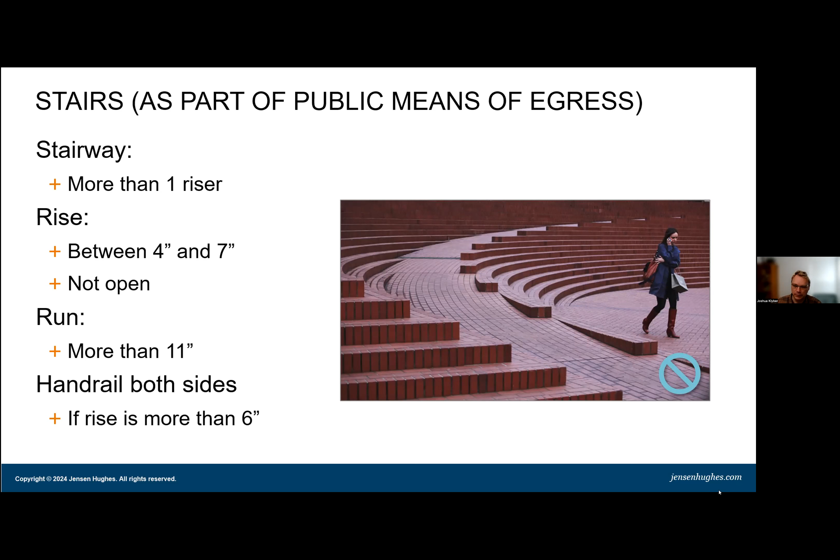All right, handrails, 34 to 38 inches. Going back to that UFAS, I made comments about that earlier. UFAS requires that handrail tops are a minimum of 38, I think it's like 38 to 40 inches. That's one of the reasons why it makes it really hard to use UFAS.

Handrails have to be an inch and a half from a wall if they're adjacent to a wall. Grab bars totally have to be an inch and a half away. At a ramp or stairs, you have to have a 12-inch horizontal extension. At the bottom, if you're at stairs, it's one tread depth, or typically 11 inches, though most people generally go for 12 inches. If you're at a ramp, it's going to be a 12-inch horizontal.

Talking about continuous and returns, these extensions have to be in the direction of travel. This gets a little complicated when you're in a stairwell, say at the top of a stair, and you have a full stair landing, and you just want to do an immediate 90-degree turn on it. You can't do that. They have to go 12 inches in the direction of travel.

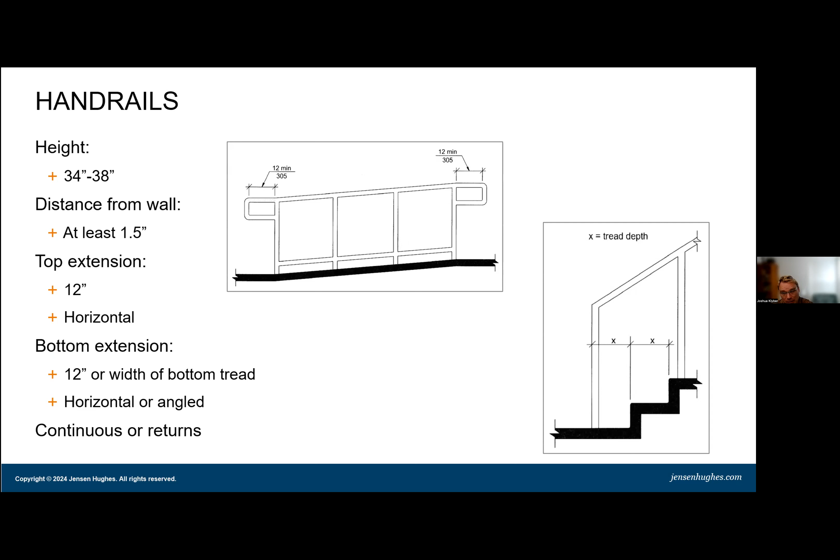There's also some confusion about how you measure that 12 inches. If you take a look at the ramp diagram, it measures it to the inside of the downward turn on that handrail. If you look at the stair diagram in the bottom right, it measures it to the outside of that downturn. To be safe, I would measure it to the inside.

Monumental stairs. This is often confusing. Generally you put the handrails where most of the traffic is, and the handrail has to accommodate all occupants within 30 inches of a handrail. The general rule of thumb is that if you have a 60-inch wide space, you put an intermediate handrail in, but that's not necessarily always true - it's dependent upon the occupant load. Generally, you put them where people are traveling.

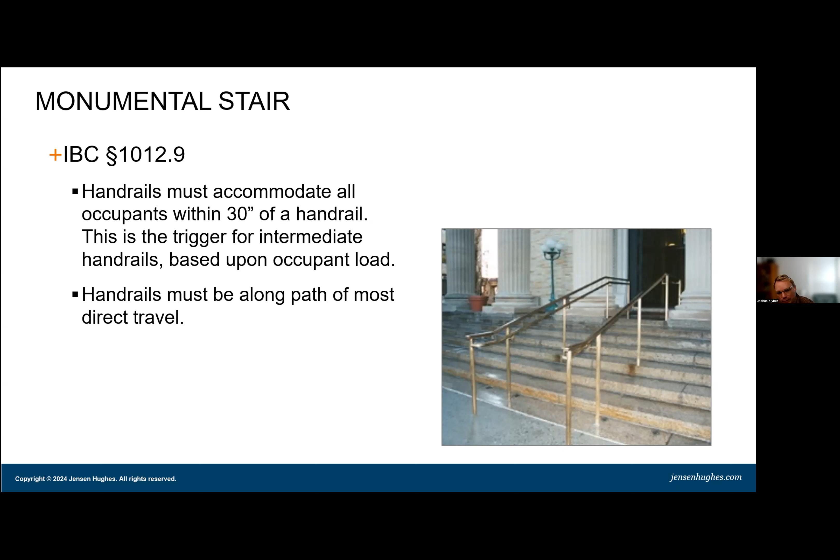And if that space is wider than 60 inches and you have a high occupant load, then you will need to have an intermediate handrail. Don't put them all the way at the edges on a monumental stair like this, where that's not super helpful.